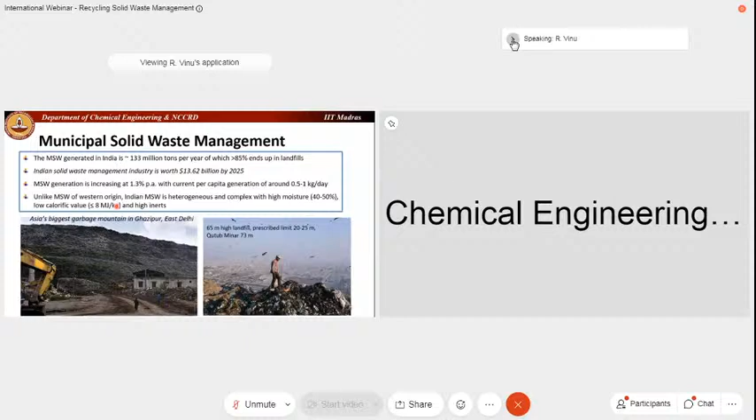So unlike MSW of Western origin, Indian MSW is highly heterogeneous because it contains a lot of domestic food waste and bioorganic waste, which results in a significant amount of moisture. Because of the very high moisture, the calorific value is going to be very low. Apart from moisture, it also has a lot of inert materials such as sand, glass, metal canisters. So a lot of these constituents are present in our Indian MSW, unsegregated in the landfills.

And the conventional technology practiced, for example, in Tamil Nadu is composting. Typically, the organic wastes are treated very well, but the inorganic waste, the plastics, are not so well treated, and this is what really ends up in the landfills. And what are these plastics? A majority of these are single-use plastics, constituted by the packaging waste.

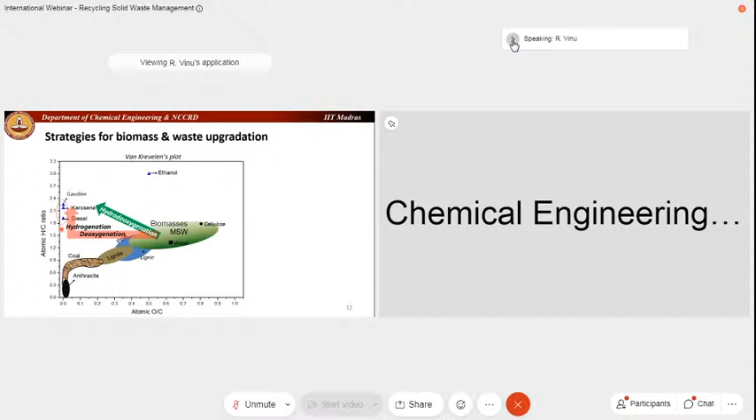So if you now want to convert them to gasoline, kerosene, diesel, which do not contain any oxygen but typically contain carbon and hydrogen at a ratio of 1:2, we need to do a significant amount of deoxygenation, and we also need to do what is called hydrogenation. Because deoxygenation means we want to remove oxygen from the material, but oxygen can be removed only in the form of carbon dioxide, carbon monoxide or water. That means for every atom of oxygen that is removed, we are also losing some carbon or some hydrogen.

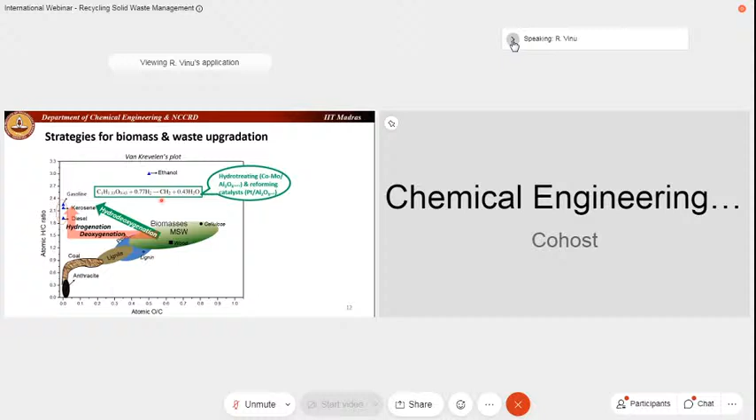As a result, we need to do hydrogenation along with deoxygenation, or what is called hydro-deoxygenation. That's a combined hydrogenation and deoxygenation in a single step using catalysts that can produce hydrocarbon-based fuels. So coming to the topic of our process.

One of the key challenges with the majority of thermochemical technologies like pyrolysis or gasification is that we need a feedstock which is dry. That means the moisture content has to be lower than 10% or 15%, so that we are not spending a significant amount of energy simply to dry the feedstock.

So one of the key processes that can be used to produce liquid or solid fuel from wet feedstocks, such as solid waste, which can contain even more than 60-70% moisture, or feedstocks like algae, which are grown in water bodies, is a technique called hydrothermal liquefaction.

What is hydrothermal liquefaction? It's very simple. It's a method that mimics Mother Nature in producing fossil fuels. Typically fossil fuels like crude oil and coal are generated underground over millions of years through the application of high pressure and temperature. We are trying to mimic the same thing in a reactor by maintaining subcritical conditions.

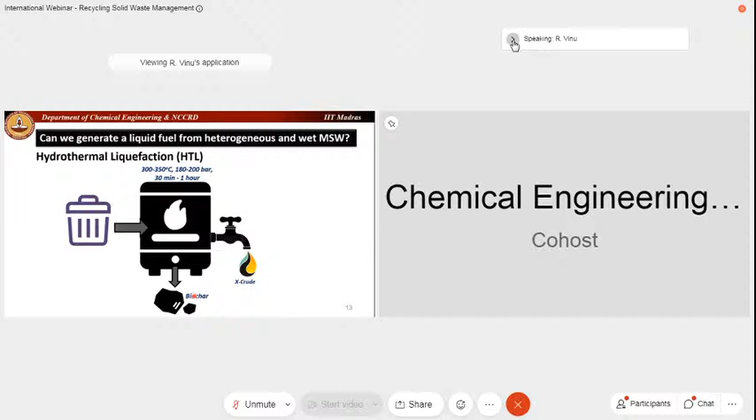So it has a lot of advantages, but the major disadvantage is it is highly viscous. Its viscosity is very high, and so it is not very easily flowable. As a result, there are some disadvantages with biocrude which we need to tackle to make sure that we are able to utilize it as a liquid fuel.

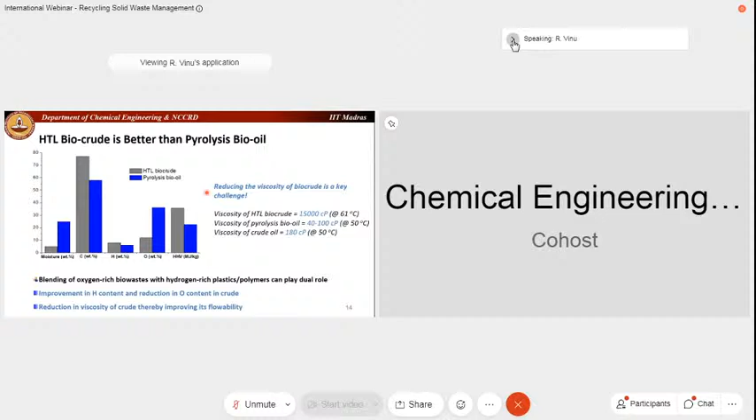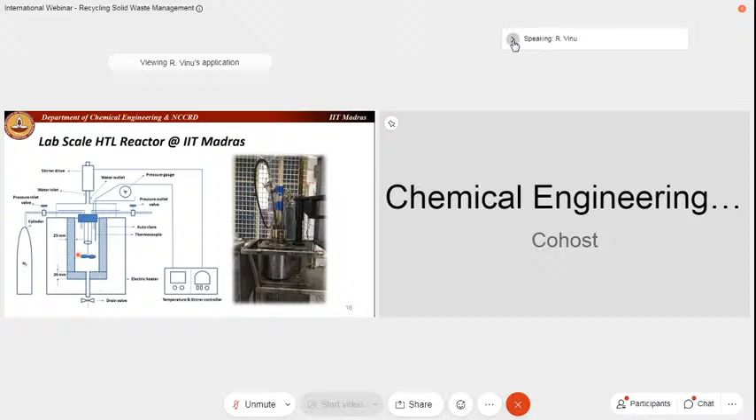Once we release the pressure, we can take out the gases, collect the gases, and analyze the gases. The reaction mixture is going to contain the aqueous phase, the biochar and the biocrude all mixed together. So we need to separate them, adopting some standard techniques. For example, one practice is filtration. On a larger scale, we can use a filter press,

but on a smaller scale, we can do a vacuum filtration, and we can also do solvent extraction using favorable solvents like dichloromethane or ethyl acetate and so on. Then we can separate out the solid phase, the liquid biocrude phase, and the aqueous phase into 3 different fractions, and then evaluate their quality.

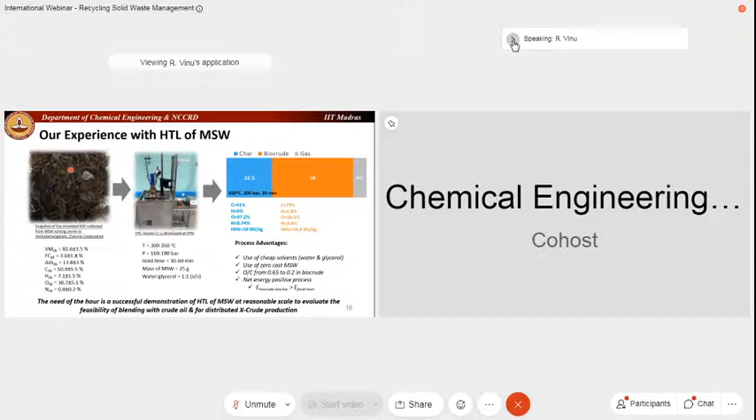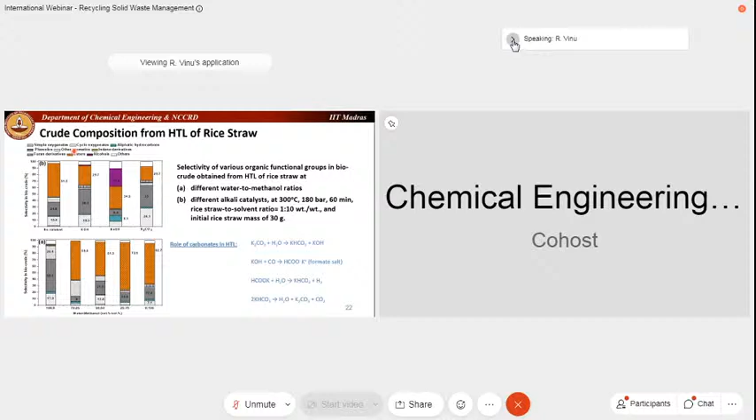For example, with potassium hydroxide, sodium hydroxide, and potassium carbonate, we see different compositions of the biocrude product. In one case, we are getting more long chain alcohols, whereas in other cases, we are getting a lot of phenols in the biocrude. And even by changing the water to methanol composition, we can change the selectivity of the product. For example, once we add methanol, we see a significant amount of esters in the biocrude, because of a variety of esterification reactions that occur when we add an alcohol like methanol as a co-solvent.

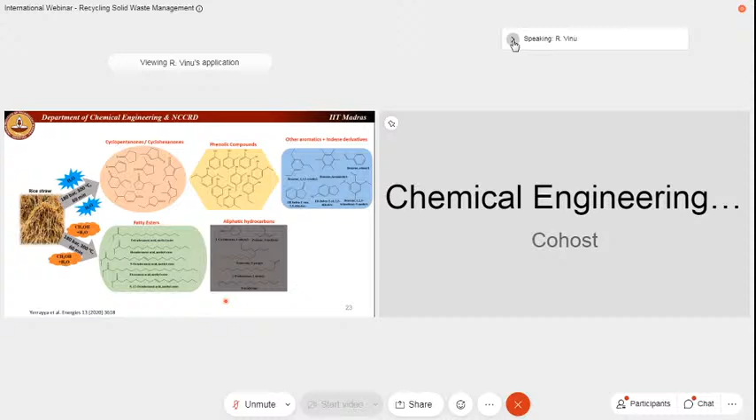So you can see that without any co-solvent, we get mostly cyclopentanones, cyclohexanones, phenolics, and aromatics, whereas with alcohol, we are getting a lot of fatty esters and aliphatic hydrocarbons. So the presence of a solvent can greatly affect the composition of the biocrude in terms of the reactions it undergoes, along with the products that are generated during the process.

Finally, we need to make sure the entire process is sustainable. We get an aqueous phase product containing some organics and also ions transferred from the biomass. This is a typical flow sheet where we recirculate the aqueous phase back, enabling process intensification to improve product yields while minimizing water requirements. Even though we use distilled water in experiments, we are also investigating how to use impure water, like effluent treatment plant treated water, which isn't of drinking quality, in this hydrothermal process.

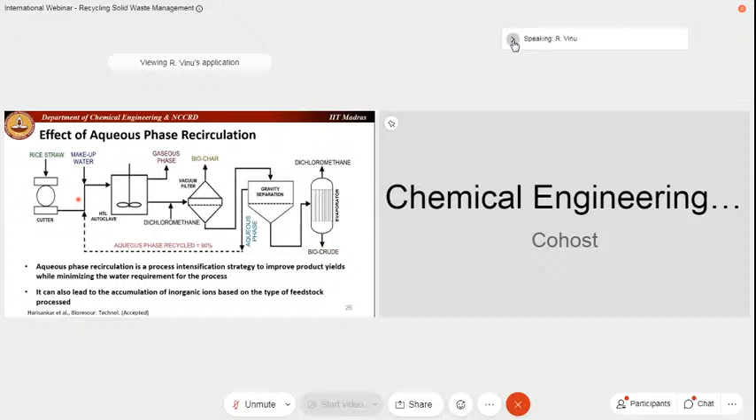In this process, we took 80% of the aqueous phase, mixed it with some makeup water, and repeated this experiment multiple times to see how product yields change. Starting with fresh water, we then did recycle 1, recycle 2, and recycle 3. We see that the yield of biocrude is decreasing, whereas the yield of biochar is increasing.

This was partly correlated with increasing potassium and chloride content in the aqueous phase with every recycle, because rice straw contains significant potassium and chlorine which transfer to the aqueous phase during the process. We also see significant calcium and silicates transferred to the aqueous phase, which can alter the quality and yield of products generated from a material like rice straw.

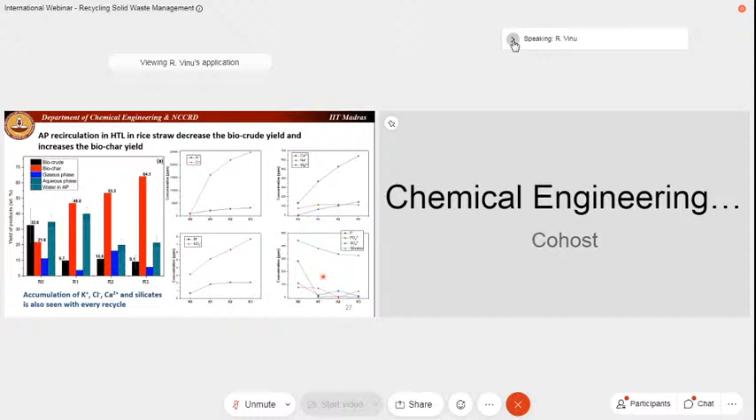To summarize, we are expanding the feedstock range. I've shown results with rice straw, bagasse, MSW, and we've also performed studies using defatted yeast and macroalgae like Kappaphycus and Spinosum. Overall, there is huge potential for this process to emerge as a feedstock-agnostic process, one that can take feedstocks that are really wet as well as significantly dry, with no limit on moisture content.

We are trying to go up in scale, because most of our experiments so far have been with small scale batch reactors. It's important that we establish the process with continuous reactors and on a larger scale, so it's easily adoptable by industry later, which we are trying to implement through our startup company.

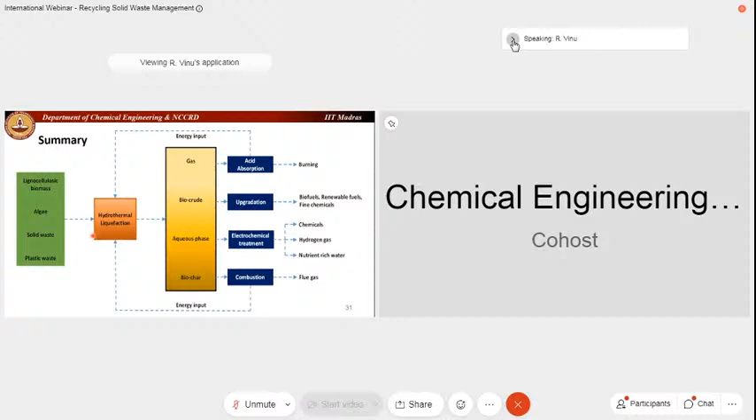So this I would like to present as a summary of the whole presentation. And finally, acknowledgements to my students who have been working on all different topics, and to my collaborator who is especially working along with me on the hydrothermal liquefaction process, and funding by a large variety of industries, not only on hydrothermal liquefaction but also on pyrolysis related technologies.

Our HTL works have been funded mostly by Engineers India Limited and C6 Energy, who have been supporting us on the macroalgae hydrothermal liquefaction process. So with this, I would like to close and thank the organizers for the opportunity. And if there are any questions, I can discuss.

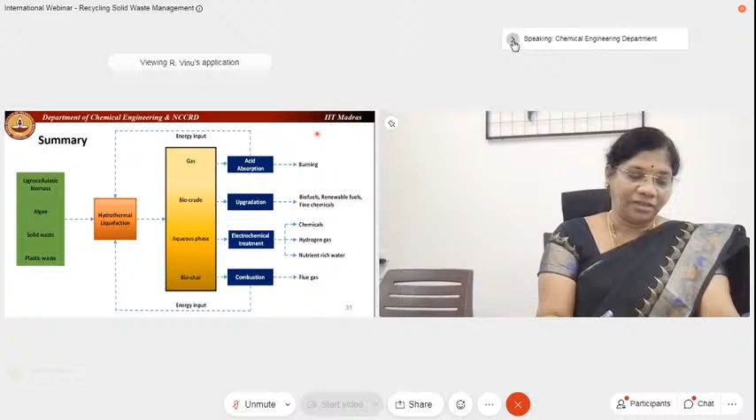Any queries from the participants? Okay. Thank you, sir, for taking the time. Am I audible, ma'am? Yes. Thank you, sir, for taking your valuable time to share your knowledge with us.

We now understood how a lot of energy is being wasted, as there is not proper utilization of agro waste, municipal waste, and how proper disposal and usage of these wastes can be helpful in generating energy. We also understood what hydrothermal liquefaction is and its importance, and the advantage of hydrothermal liquefaction biocrude.

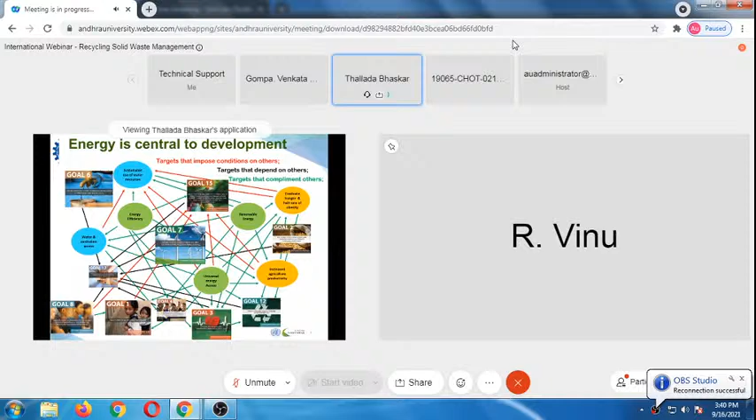The scientific and technological interventions have to be looked into: how economic benefit can be obtained with scientific and technological thought to use these material transformations. What actually is resource efficiency? Resource efficiency we can define in two ways. Use less resources to produce the same given output, or use the same given resources to get more output. So either you reduce the resources or increase the output.

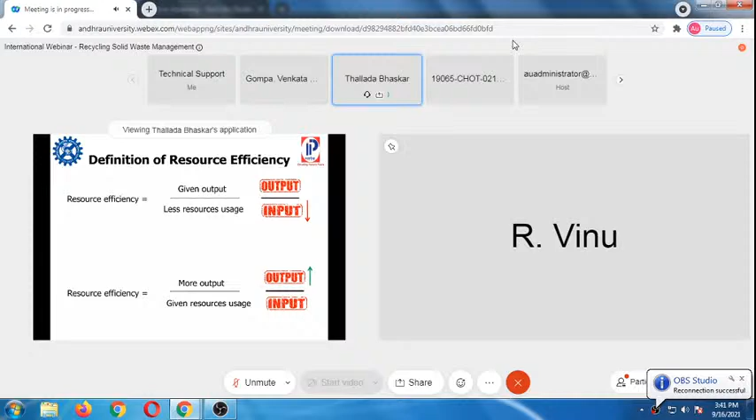That is what we normally call crop yield per drop. That means using the same drop of water, we need to increase the efficiency of the food. Similarly, resource efficiency has to be improved. But we should not be restricted here. There is a lot of deep thought in it if you look at efficiency: how it has to be connected to the circular or linear economy.

Ever since human existence we have been living in a linear economy way, only looking at economic development, but at the same time we create a lot of environmental issues. So environmental degradation is beyond our control. Now, what actually is the circular economy? Circular economy teaches us to develop the economy, but without environmental degradation. So what we have to do is decouple economic development from environmental degradation. This mantra of circular economy has to be looked into.

I will go through some of these slides, the case studies, and how strategically they have been utilized for the linear and circular economy. Now the issue is we have 1.3 billion population and we have a lot of developmental needs, but the heavy usage of resources has serious consequences on the environment. So the negative impacts have to be addressed. That is why the efficient use of resources is essential for India.

Most of the audience are students. So it is my sincere request to think about the way we have to address solid waste management, or look at solid waste in a different way. Otherwise, again, we will end up in a bigger problem than the mistakes we made over the last 50 or 60 years by utilizing fossil-based resources without doing any end of life cycle assessments or end of life treatments.

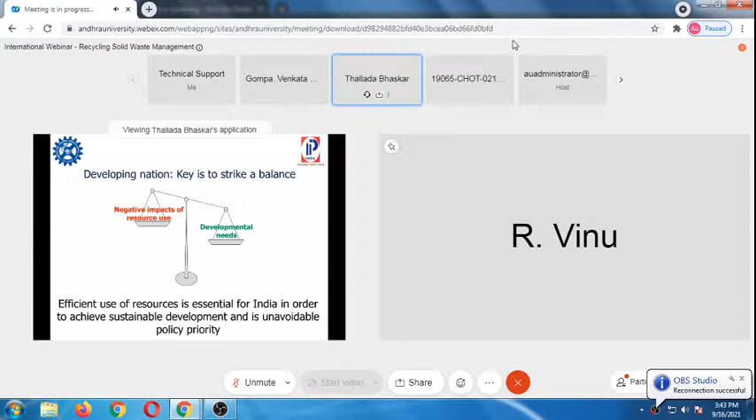With this brief background, when we look at the national priorities, the Government of India and the INDC decided that for the 300 million with no access to electricity, we should provide 24/7 sustainable energy to all, and committed to reduce carbon intensity by 33 to 35% by 2030 with respect to 2005 values, with fossil fuel reduction and renewable power increase. There are several commitments which are directly or indirectly linked to energy and also the bio-based.

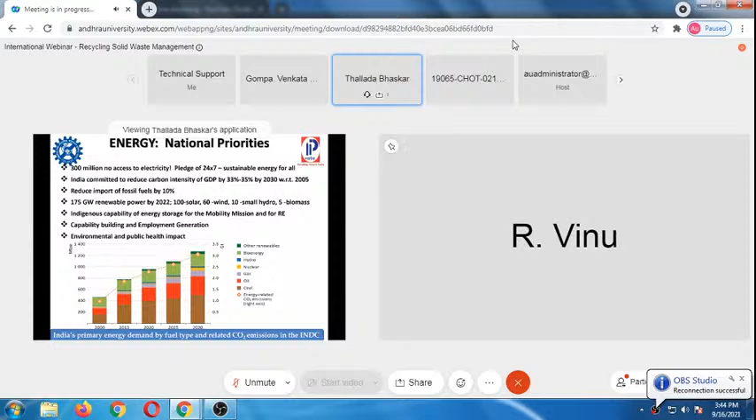I don't want to explain, because several people explained the present usage and the numerical values of energy for India. Now, India is on the path of self-reliance. What we are thinking of is that biomass is an important resource in the process, and it is a renewable material, and it is organic carbon. It is not inorganic, it is organic carbon. Why is it organic carbon?

When we see the energy or the hydrocarbons being utilized today, whether it is for a chemical or an energy purpose, it is basically the organic carbon coming from the fossil-based resources. With this thought, we need to look at the availability of the organic carbon resources. So the renewable carbon resources aptly suit this. The reason is, whatever we call today the fossil-based resources, they are also formed from renewable resources only.

If you see the history of the crude oil, the history of the fossil-based resources, they have been formed below the earth's crust several years back due to the pressure and the temperatures exerted there. So they formed in the form of gases and liquids. The same way, we can also produce biomaterials, biochemicals, biofuels in the form of energy or chemicals using the bio-based resources.

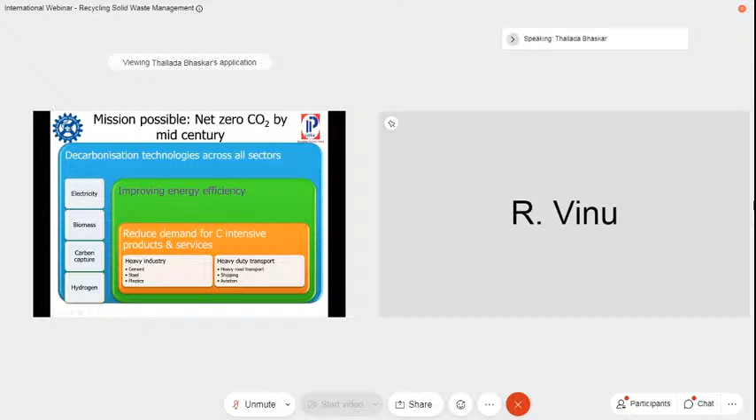So now, decarbonization: we are thinking of net zero carbon dioxide by mid-century. That is what the Honorable Prime Minister conveyed from the Red Fort on August 15th also, that we need to decarbonize the technologies across all sectors. How this will happen, and how our young students attending the event should think down the line, to see by 2050 from now onwards.

That is, to understand the decarbonization processes for electricity, you can use biomass and also carbon capture, and finally hydrogen is also one of the best solutions, provided the end-of-life emissions can be sequestered or used for different applications. The most important is energy efficiency. If we improve energy efficiency by reducing carbon emissions, we need not depend much on the renewable resources too.

Then the reduction of the demand for carbon-intensive products, basically the heavy industries, that is cement, steel, plastics, and the heavy-duty transport, that is the highways, and also the shipping and aviation sectors. These need to be utilized by the hydrocarbons. These are the major ones, but there are several minor industries which will still depend on them even after 100 years. Considering this, the strategic design of use of these carbon materials is essential.

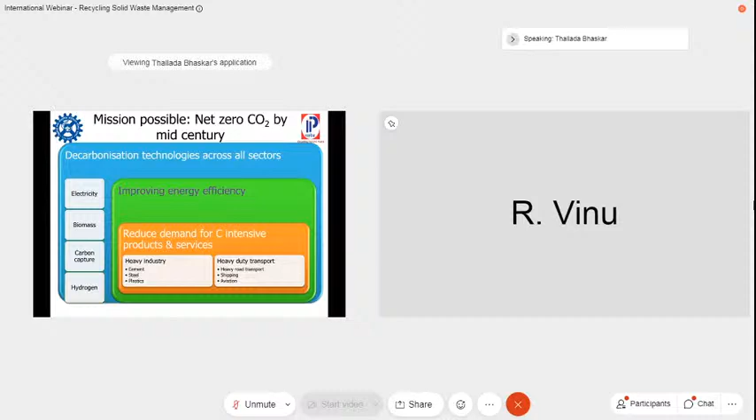When we assume decarbonization by 2050, what is the genesis for this? If we see the genesis, today, as the professors mentioned, the import of crude oil is approximately 220 million metric tons, and the carbon present is 85%. The carbon content is 190 million metric tons, coal around 150, and similarly natural gas. So the total imports are approximately 350.

If we are able to find approximately 350 million metric tons of carbon atoms, I am not talking about the hydrocarbons, because even the crude oil we process downstream. Being a scientist at the Indian Institute of Petroleum, how many different downstream processes will there be to make the fossil-based crude oils into transport or liquid fuels? So that we need to think of.

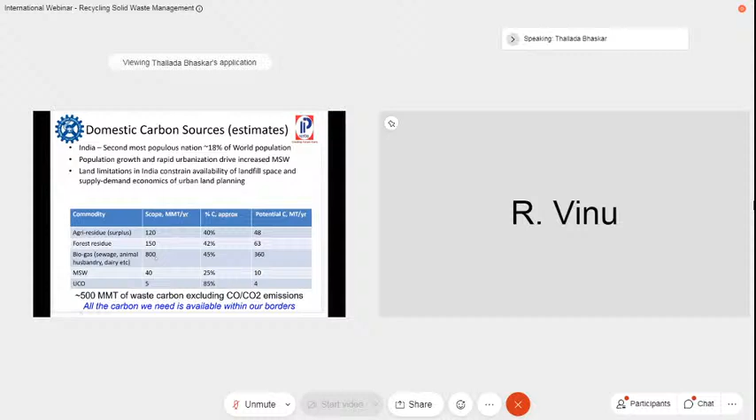If we see the available carbon resources domestically in India, there are more than 500 million metric tons of waste carbon. Now you can see here the agricultural residue at a minimum level, if we assume 120 million metric tons, forest residues, biogas, municipal solid waste, used cooking oil, there are so many, and these values I have taken at minimum. You will have more than 500. With this, we can meet the energy requirement and sustainability.

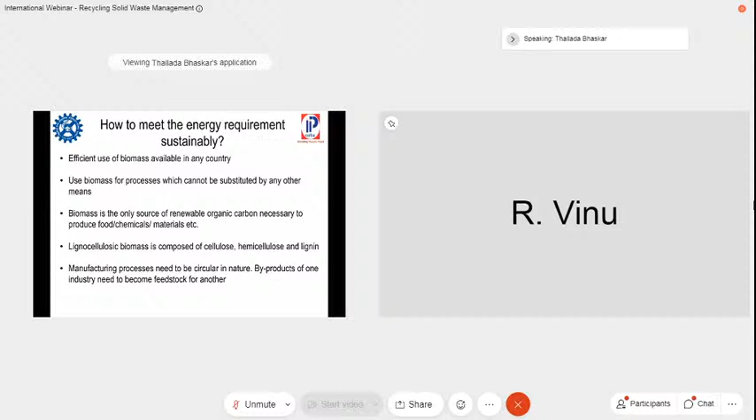As I mentioned, biomass and efficiency improvement, and manufacturing processes need to be circular. As for the available options, the Professor already mentioned them, so I will not take much time on this. There are first, second, third generation biofuels based on the feedstock, and being a 1.3 billion population, we cannot depend on edible materials, so we should only look at the second generation, which is non-edible biomass.

As a scientist and a National Task Force Committee member working on the National Biomass Policy, the National Biofuel Policy says clearly: reduction in oil imports by substitution with renewable fuels, 20% blending of bioethanol and 5% biodiesel by 2025. You might have seen several news articles recently; ethanol blending all over India is already around 8% and is being practiced from different resources, to achieve a 35% reduction in energy emissions.

To address this, we have more than 260, 270 million metric tons of surplus biomass available, 270.

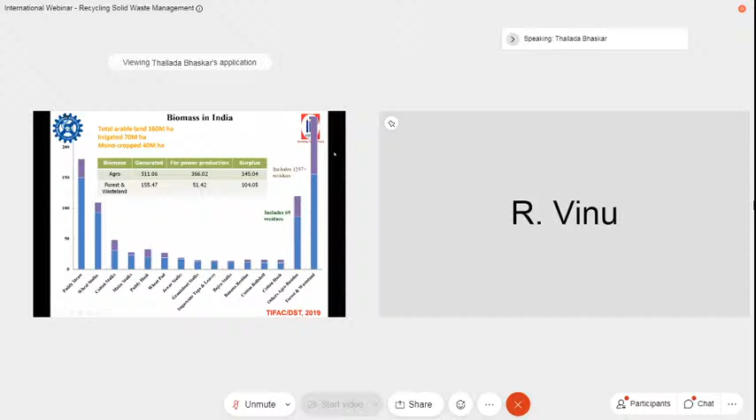And now you can see that this is much more available. This is a 2019 report, and recently we have released another report in 2022. If we see this one, there are different varieties of biomass residues, basically the wheat straw, rice straw, cotton straw, and maize. Some part is gram, that is also around 6%.

When we say biomass or the non-edible biomass, it is similar to other fractions or other resources also. When we say crude oil, all crude oils are not the same. The Australian crudes, Vietnam crudes, and the Gulf crudes are completely different. We need to do some pre-treatment process in order to make them suitable for the downstream process. Similarly, there are differences here that we will discuss in the coming slides.

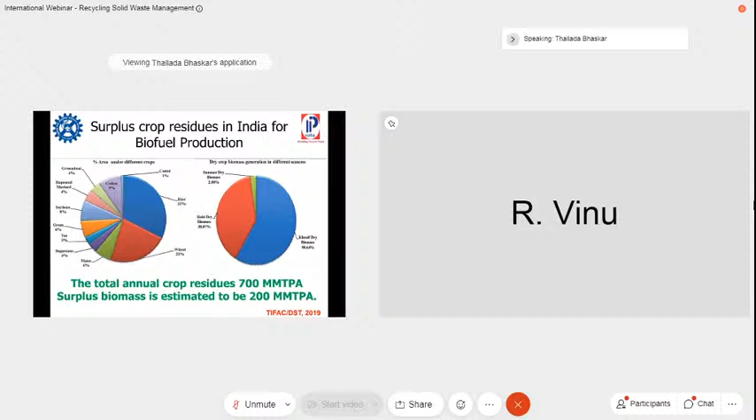So the total annual crop residues are around 700 million metric tons, surplus, as I mentioned, around 200. We need to convert this into the different products required, meaning locally available resources for local applications and local demand. As I mentioned, the demand and supply both match, or the supply is more than the demand, so what is the problem? The different climatic zones in India mean the biomasses available and the types of biomass available are not the same.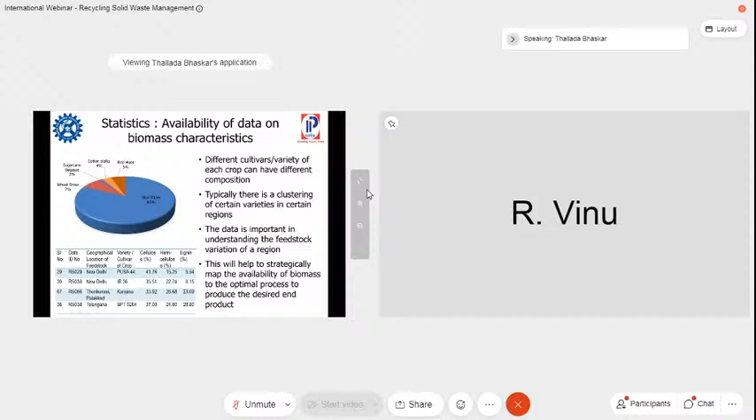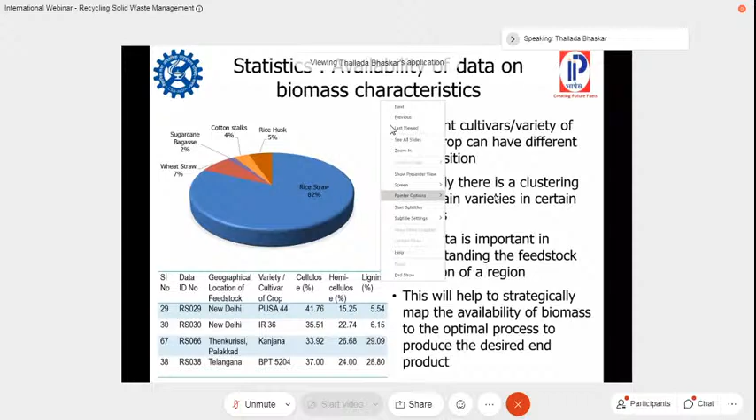Now you can understand, we cannot assume lignocellulosic biomass is uniform. No. You can see 30% lignin and 5% lignin. These two biomasses you cannot process by adopting the same technology. This is a small indication I am giving.

Now you can see the cellulose, which is basically the primary constituent for ethanol production. The difference from 33 to 41 is around an 8 to 10% change. When you see the downstream process of a 100 KT ethanol production plant design, it is tough. You cannot design a unit for so much variation in cellulose, because the downstream process will have a lot of variations. So we strategically map the available biomass to the optimal process and the desired product.

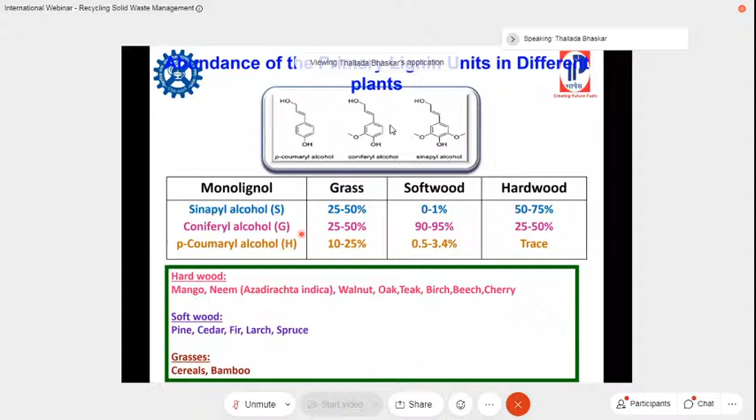Now, if we look at the different biomasses, there are grass, softwood, hardwood. Sinapyl alcohols, which are primarily available in the plants, are 25 to 50% in grass, only 0 to 1% in softwood, and here it is 50 to 75%. The typical examples you can see here. That means grasses, softwood, hardwood are all biomass, but the composition of the monolignols present, the S, G, H units, is completely different.

This is another most important point you have to understand: the composition is much different. As an applied chemist, I can explain more that in softwood and hardwood, if you see the bonding, there is much difference in the composition of the different biomasses. The chemical structure of the phenol remains the same, but the bonds present are completely different. With these deviations, you can see the phenolic OH is 20 to 28 in softwood and 9 to 20 in hardwood.

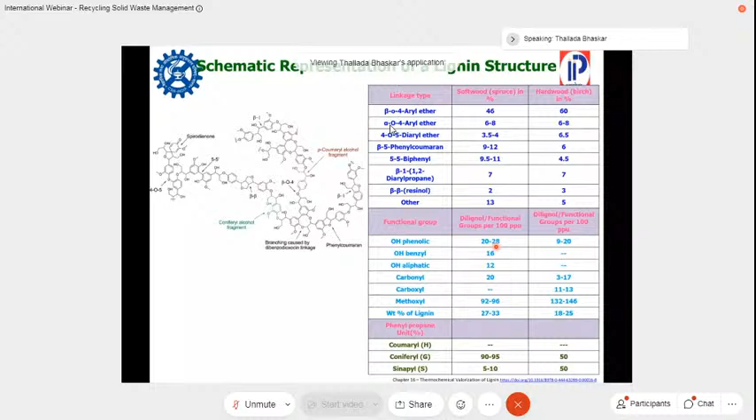With this much variation, you cannot design a single process to give the same yields, or the benchmark, or the viability of the process, or the commercialization. Now you can see the kinds of bonds present in the different biomasses. So with this concept, with these complexities of the biomasses, the title of my presentation is defined as the strategic design of the biomass for the production of chemicals or fuels for national domestic requirements.

So with this, we are compiling information on biomass availability across the different states, and this is a report available with TIFAC, which we recently published, in collaboration with space satellite data from Jaivoorja, from the NRSC, Government of India, so that this dynamic data is available for designing processes across approximately 623 districts in India that we have been matching.

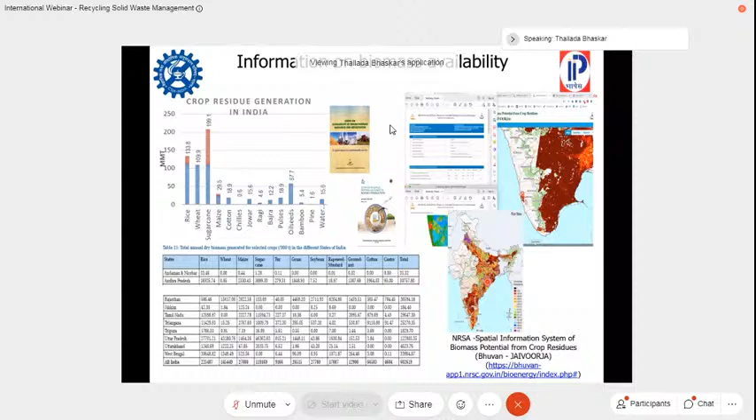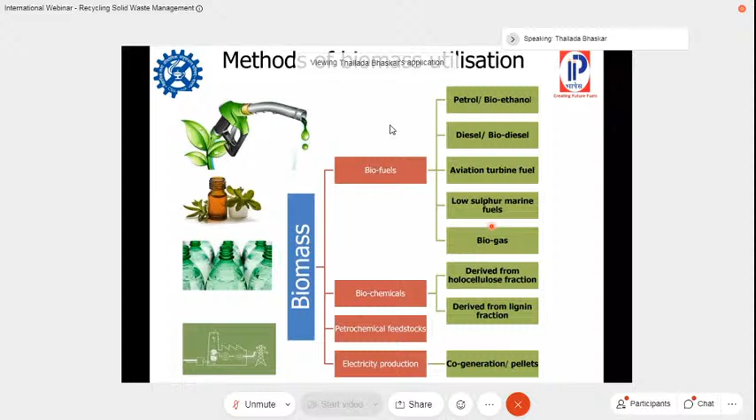Now, what is possible with the complexities here? Technically, chemically, you can produce all the products, but the basic platforms for biomass conversion are biotechnological, thermochemical, or thermocatalytic processes.

We like to explain the unestablished or the developing processes, compared to ethanol, which is at the demonstration scale of the large scale processes here. I will take you through some of the studies, the experiments done at our laboratory at IIP.

We have been working on carbonization, biomass to chemicals, different pyrolytic processes based on the feedstock, slow and fast, hydropyrolysis, liquefaction, that is hydrothermal liquefaction, and also finally, wherever it is possible, trying to upgrade the bio oil to fuels and chemicals.

And last but not least, the kinetics and thermodynamics, because after the laboratory scale study of the 1 kilo reactor, or the milligram level or the gram level studies, we need to do the ton scale, at least ton scale, because of the advantages in decentralized processes. We develop these different models.

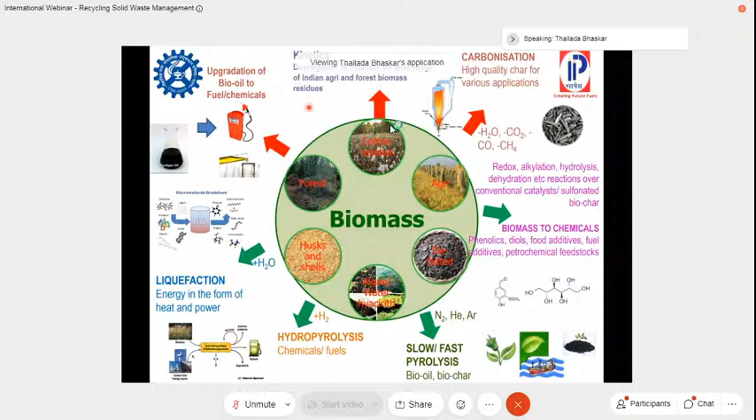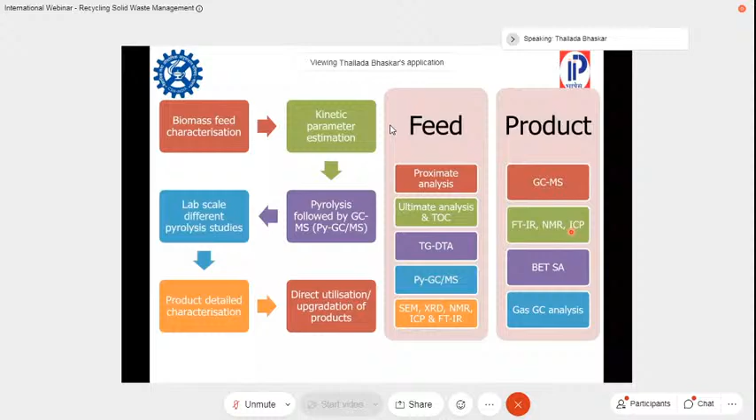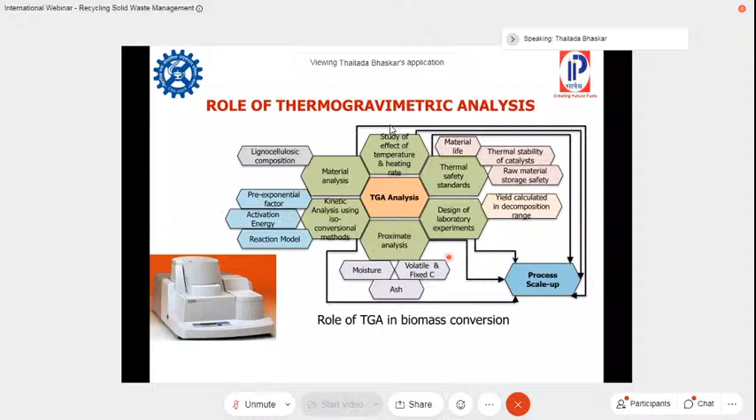This is a typical role of thermogravimetric analysis. As chemical engineering students, it is very important to understand the data using artificial intelligence or Python programs or different data sets, to understand the mechanisms and kinetic triplets, which are required for process scale up. We do this kind of mathematical treatment of the kinetic analysis by estimating the 3 different triplets and also design different models.

Otherwise, if we don't have models, all biomasses cannot be operated with the same reaction parameters to obtain a suitable product. Now you can see that with the change of the conversion, how the product profiles will change, how the kinetic triplets will change with the conversion. It is not like a conversion of a simple compound like benzene to phenol or ethane to ethylene, where throughout the reaction the endothermicity or the thermodynamics remain the same, so that you can control the reactor. But that will not take place in conventional or thermocatalytic processes.

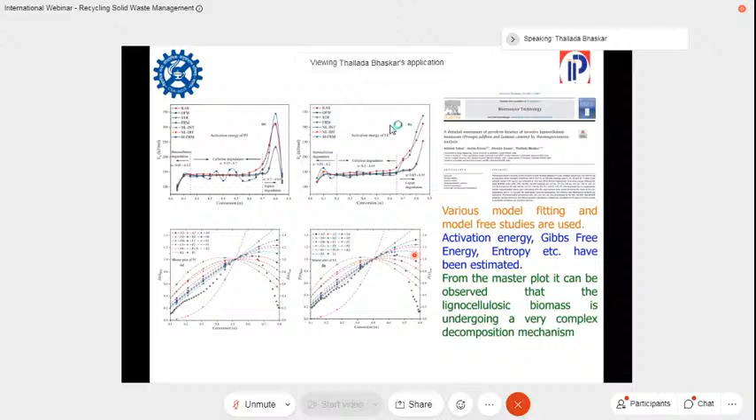Not only this, in other processes also, like the biochemical process, you need to design or pre-treat the materials so that you can control the energy, heat and thermodynamic balance. So we do the different master plots using several mathematical treatments. We have published several data and designed our own models, and they fit to more than 99.

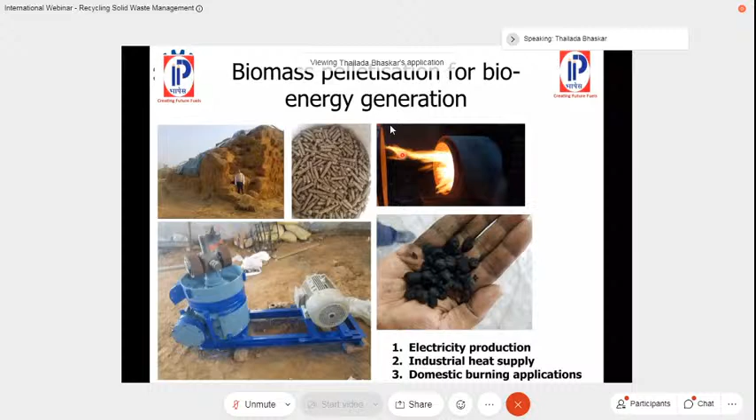Not every material can be made into pellets so easily, like our vermicelli. Not every rice straw, rice flour or other flour can be made. Similarly, the required strength and required properties must be met. So the design of the burners and pelletizers has been done for different applications used in the fields, and we are supplying this torrefied or pyrolytic material, or the biochar, for applications in different places.

Similarly, as Professor already explained the hydrothermal conversion process, I will not discuss it much, because I will explain the case studies which we have done. It has a lot of advantages, as Professor explained.

Our field study applying this is invasive aquatic species valorization, from Imphal, in the Loktak Lake. It is the only floating lake in the world. This floating lake has a problem because of these species, the paragrass, phumdi, and the water hyacinth.

We are trying to take out this one. We have done work and we have published articles and patents, and they generated the knowledge base for the conversion of these materials to produce value-addition compounds and functional chemicals.

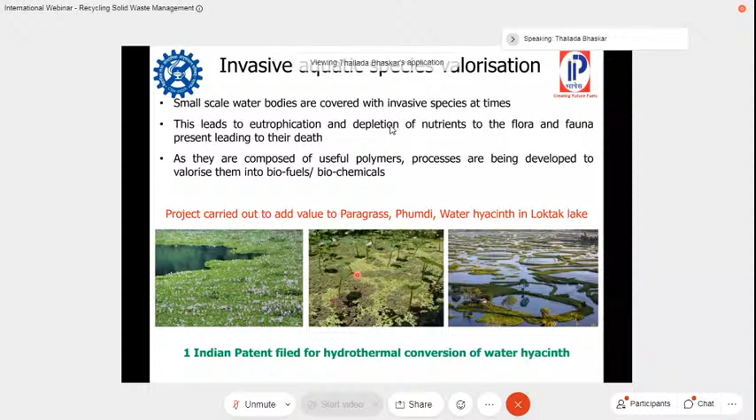Now, the next feedstock, which is the most important with 2G ethanol, is coming into the picture. In the ethanol industry, only the cellulose is being utilized for the production of ethanol, but the remaining lignin, which is presently unutilized, is burned for energy applications within the biorefinery. But this is the most important carbon material. Burning of this material needs to be stopped by using other materials.

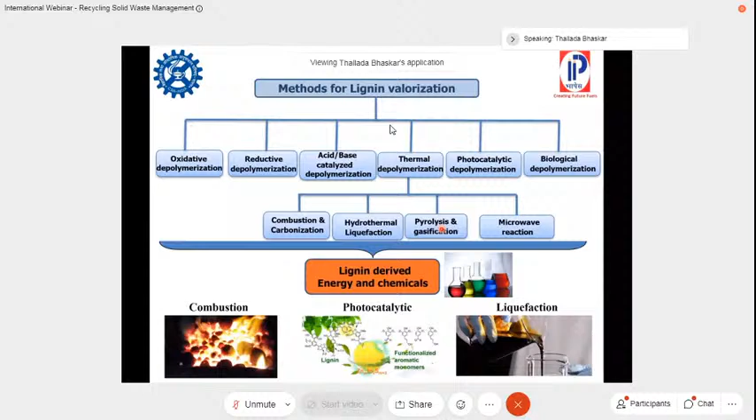So the process for lignin valorization. There are several treatment processes, but the lignin produced by the different processes will have different functionality. They are called different lignins; all lignins are not the same. So we are trying to utilize them using different approaches. If the biomass treatment is 10 varieties, then the lignins are also 10 varieties. So we need to utilize different methods to convert these materials.

Like this, we need to strategically design what process, what catalyst, what condition, and what downstream process need to be adapted to produce vanillin or acetosyringone, such valuable chemicals, from waste resources. These studies indicate that the design is very important, and what kind of feedstocks. We cannot generally say that this feedstock is suitable for HTL or this feedstock for pyrolysis. Now you can see HTL is basically applied to micro and macroalgae, de-oiled cakes, invasive water species, as well as lignin.

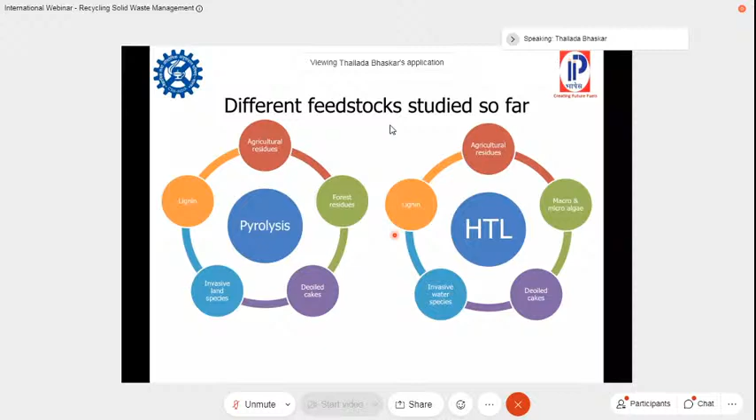But the problem is, when we want to use feedstock like stubble burned in the fields, where it is available sparsely in small quantities over large distances, how to collect, how to treat? That is the problem: supply chain management, logistics. If the energy consumed is more than the energy produced, then the conventional process will not work. So the idea is mobile conversion units.

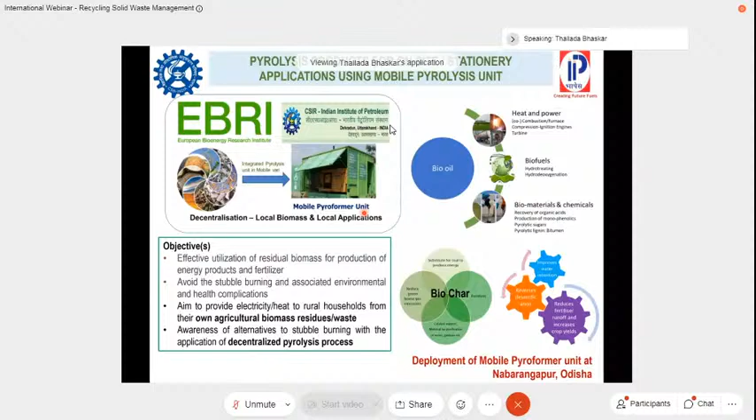This mobile unit will go to the field where the biomass will be converted, giving char as well as energy products there in the field. That will be used for enhancing the organic carbon in the soil, so that production will be more and we can move from fertilizer-based food to organic farming using these carbons, because the environmental and economic requirements for scale are not met today. That is why we are using these decentralized approaches, because these applications of the different oils are valuable. We are working with the industries.

Now you can see that these pyrolytic oils are used for herbal animal healthcare products, and this industry is present in around 35 countries producing and using these pyrolytic oils. But this pyrolytic oil process is different from the conventional one, and the feedstocks are also different, like the Patal Ganga, Patal Tantra, Patala Yantra process, as our typical Ayurveda is based on plant-based materials. We are working with this to produce from different biomass resources, and these activities are very good.

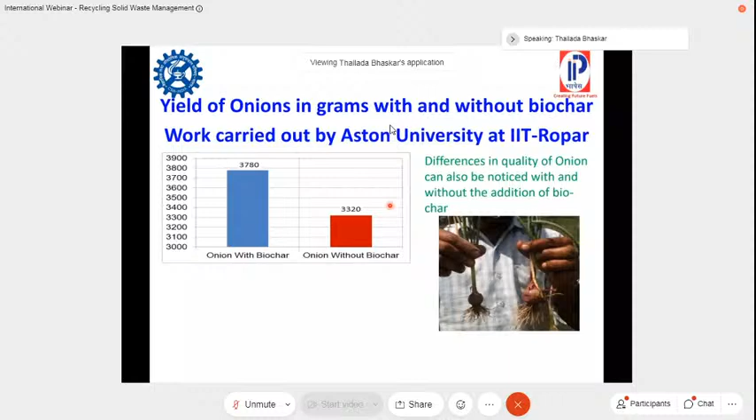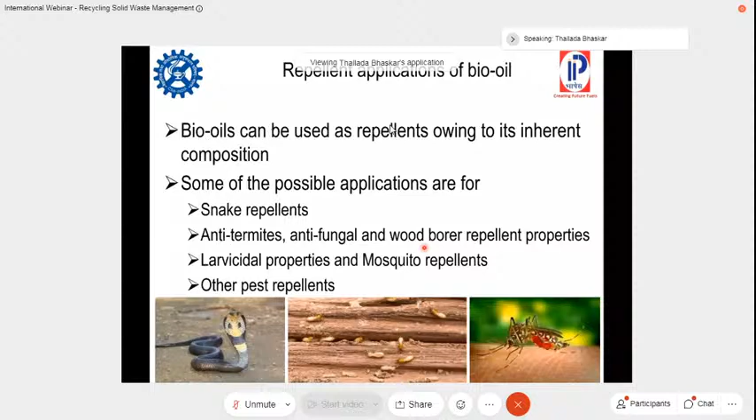Not only that, as I mentioned, with a 1.3 billion population we need food, organic food, and several governments have had issues because of onion prices. We are trying to use this pH-free biochar to increase the yield of onions, as well as applications for snake repellents, termites, fungal residue, larvicidal and other pest repellents using these bio-based components, because the present use of fossil-based chemicals has serious effects, and the market for those things is also difficult.

Now we need to find domestically available resources and applications for domestic demand, so that we need not import any outside products, and use renewable materials. Not only that, we are also trying to use other things through different processes.

In addition to the case studies, we are trying to do different fundamental studies with the help of 30 odd students in the laboratory to understand diverse feedstocks using different hyphenated techniques. Now you can see this Py-GC/MS method, used to understand the different lignins, heterocycles, aliphatic carbons, and phenolics from the different catalytic methods which I have explained.

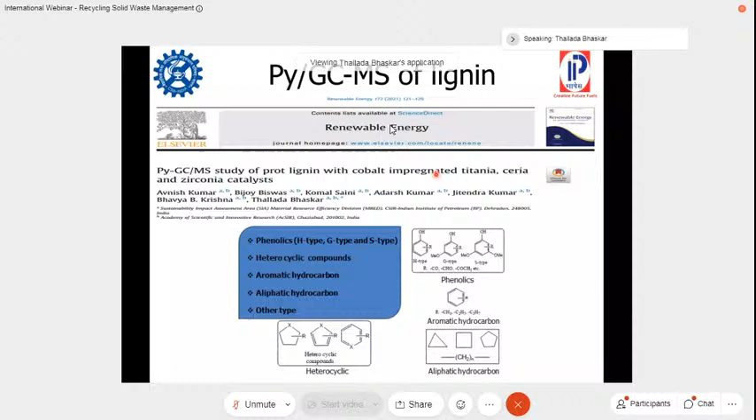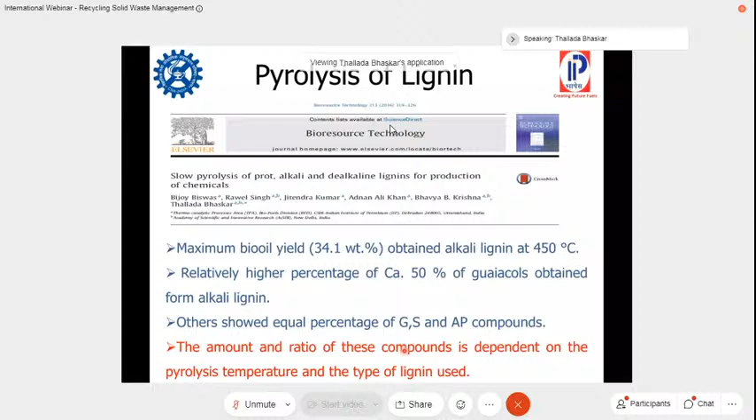Now, not just the typical one compound, we are also trying to see the increase in concentration of the guaiacols as well as other components with different lignins. Not just hydrothermal, we are also trying to see with pyrolysis also, so that value addition is possible through different alternatives, not by one method.

Because if you produce one chemical in large quantity, there will not be any market, then we will have a problem. So we need to see the supply and demand, as well as resource availability and efficient conversion.

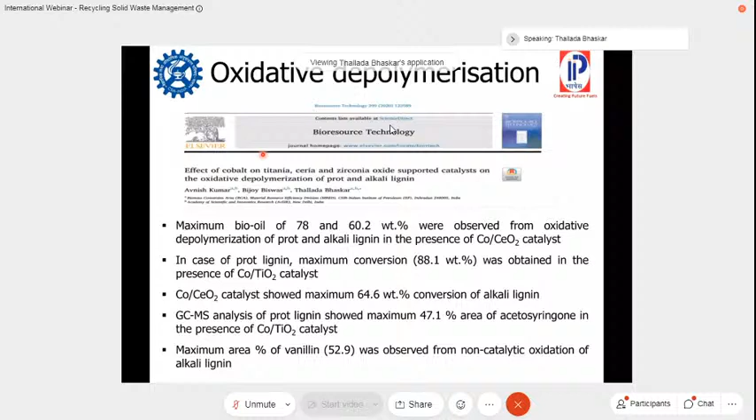In a similar way, we have also adopted the process for oxidative conversion, because the demand for simple acetic acid, vinegars, formic acid, and several other oxidation products is much in demand if you see the Government of India's data. So we are trying to convert that, and we generated the data and also prepared the catalyst to convert to the oxidation products.

In any of these dry and wet processes, we definitely get biochar. But the pyrolytic biochar, which is simple biochar, and the hydrochar, which is produced using the hydrothermal process, are different, because much of the carbon percentage is not converted, and in the processes you end up with a product that needs to be utilized.

Today, the demand for purified carbon, or carbons for diverse applications, is much high. This morning the professor mentioned the drinking water issue. Today all of us use carbons for water treatment. Those carbons need not be imported, need not be fossil based, and can be produced using waste feedstocks available across regions. But the parameters and pore structure have to be generated in an optimized process for commercial feasibility.

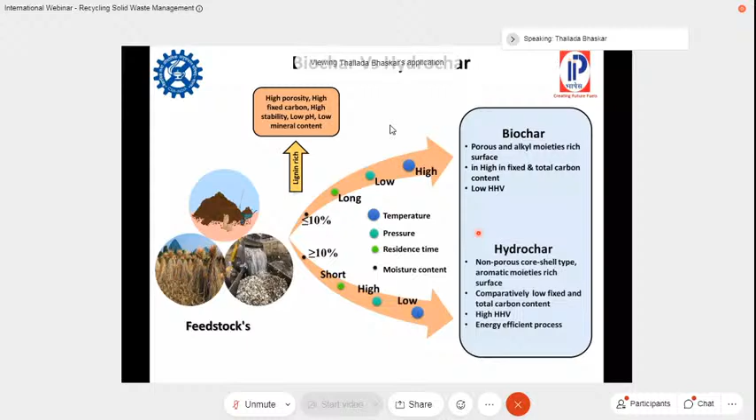With this, we wanted to have a model of decentralized small scale units to process the biomass into liquids. Once we have decentralized units convert through a centralized process, with the decentralized approach we need not transport the low density materials like biomass over large distances. Once you convert into oil and char, the heavy dense materials, similar to crude oils, can be transported to use the existing refinery infrastructure, and then produce different products.

In a cyclic, circular manner, you use the agricultural waste, harvest, then use the thermochemical process, use the energy, and also enhance the carbon in the soil to produce more food. So in a circular way, we can increase the economy of the farmers as well as use the resources, and avoid importing fertilizers.

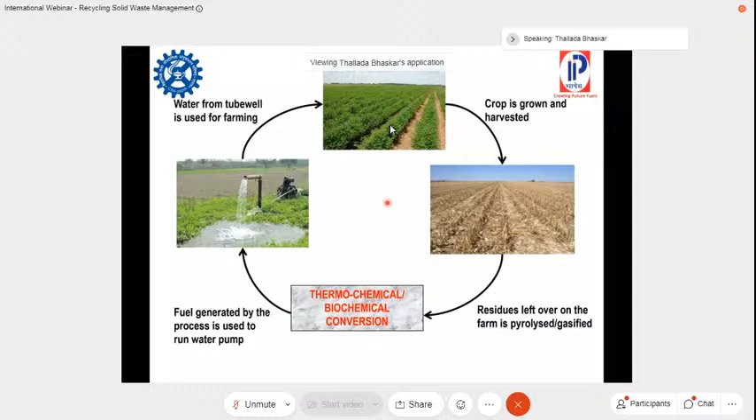We need to study different case studies. Different soils have different environmental effects, as well as different biomass available. I am working in several districts in different states in India to apply different models. This is a typical case study funded by the Global Challenges Research Fund with different NGOs. It is called the GCRF fund.

In the disadvantaged rural areas of Odisha, we are trying to generate this BioTrig model, so that we produce all kinds of products which are required in the districts.

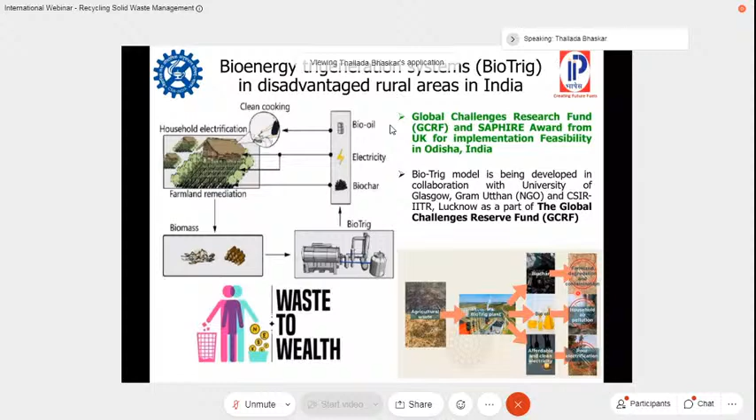This study we wanted to focus much on biochar for soil amendment, with the help of ICAR people and agricultural people, so that this can be done properly. Without proper understanding of biochar, every black material is not biochar. If it has a lot of pH, it will kill and spoil the entire soil, making it more useless than before. So one has to be very careful how one converts these kinds of materials to use as biochar for soil.

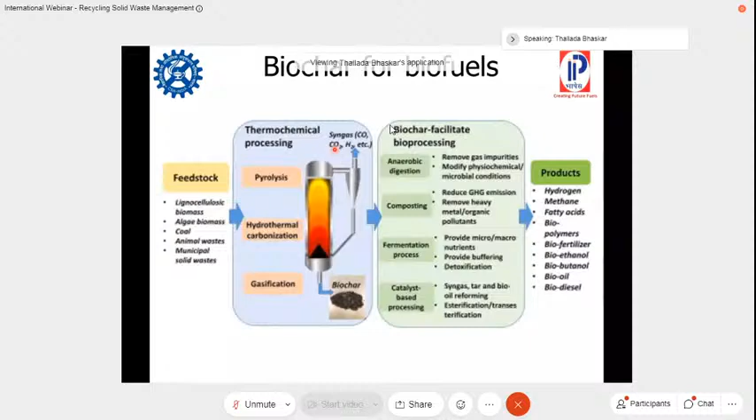Not only that, you can use biochar for different applications. I will tell you some case studies. As the professor mentioned about biochar for energy, we also use this biochar for different catalytic applications. Catalysis is a different phenomenon.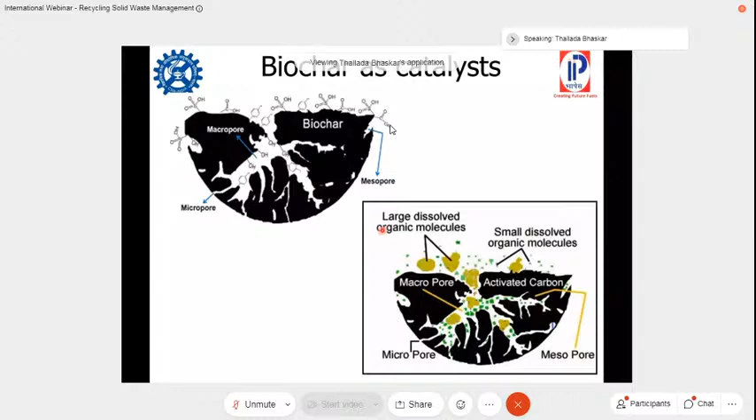It has lot of porous structure. You have the active components, active metals impregnated on the materials. We used this kind of pine needle - I am in Uttarakhand, it has lot of pine needles, and it has forest burns. Forest fires can be avoided by using this one to convert into pine char, which has very special properties. Using this special biomass decorated with ruthenium nanoparticles, we convert this into a catalytic material.

This is a highly demanded product today, and this is not an imported catalyst. Today we are importing huge quantities of catalyst from abroad. So using typical available resources and basic fundamental scientific principles, you can generate and produce this data that recently we have generated and published a big article on, showing how we can translate that.

Similarly, cellulose can be converted into methyl alpha and methyl beta glucopyranoside using a carbon-based catalyst. That is a product obtained in the form of biochar. This is a very expensive material. Only a small quantity is required, but the catalyst being presently used is imported material that we can avoid.

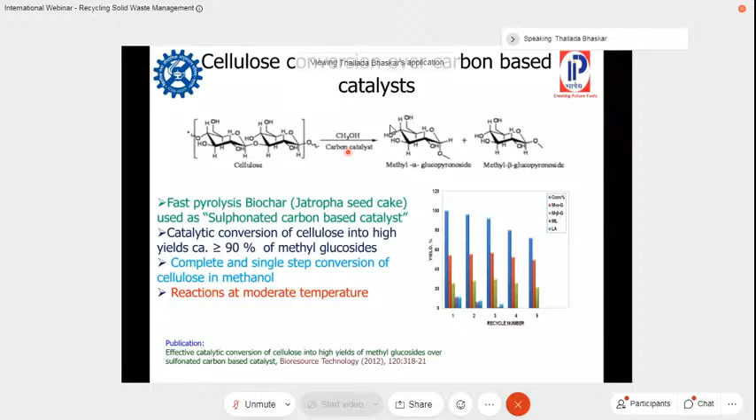By using this biochar - once you purify and identify certain feedstocks, this functional biochar can be used in electrochemical applications, and there's a lot of potential. But the functionalization, whether for hydrogen generation or electricity generation, is a small scale process because the demand for such materials is also very small. Every biomass need not be produced into this kind of material.

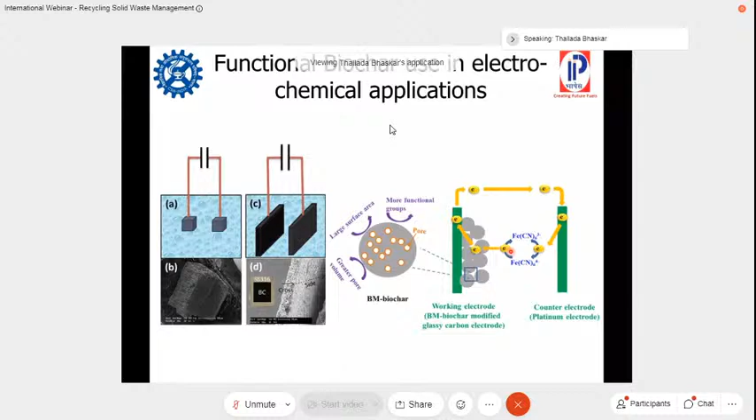Using this, we are producing specialty carbons for supercapacitor applications for the electrode. Now you can see that a typical biomass found in India has very high specific capacitance, which is comparable to even other materials. This is a waste material, optimized to use as a capacitor application.

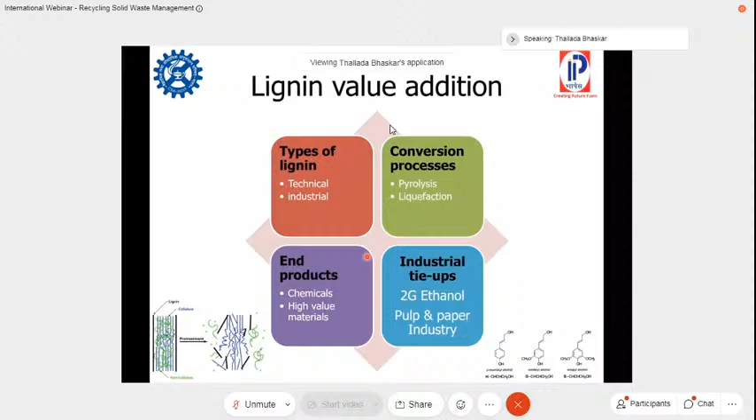Similarly, the lignin, as I mentioned, is a major component - 25 to 30% of the lignocellulosic biomass, which is not used, as I mentioned earlier. There are several applications of this. We are trying to do that by understanding and optimizing this one, but there are several challenges in terms of the feedstocks, availability, the kind of biomass, and sustainability design and renewability.

If this is not there, it will become a challenge. We need to understand the basics of thermodynamics, basics of the photosynthesis process - the amount of biomass burnt or converted, the photosynthetic efficiency to produce the biomass should be the same. Otherwise, we will have more serious consequences than the climate change happening due to the use of fossil-based resources. So we need to understand these issues also.

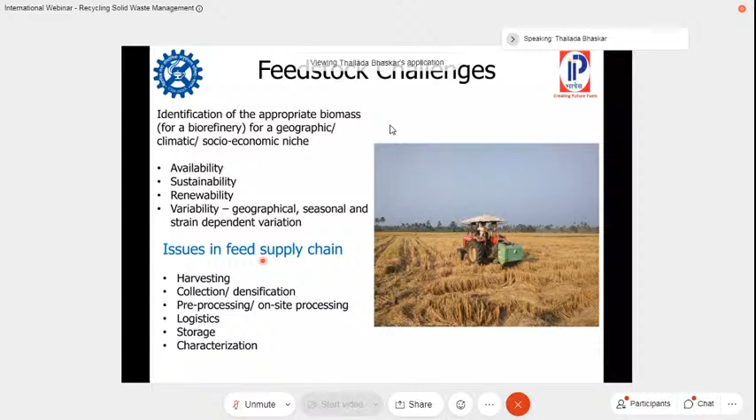So what is next? There are several strategic choices to be made for biomass utility - environmental issues, social issues, economic issues. Otherwise we will not address the sustainable development goals. You need to understand that competition between different biomasses might lead to incoherent policies and serious implementation issues. Otherwise we will end up in other issues. Strategic design, strategic application is essential.

Otherwise, every waste material cannot be produced using pyrolysis, slow pyrolysis, or hydrothermal processes. The economics, the end use of products, and the downstream separation process are most essential. So energy is the maximum required commodity, but has low value. But biomaterials without much decomposition can be produced to have carbons like these, high specialty carbons.

Biochemicals are also much in demand, but compared to energy products, only 4 to 6% of fossil-based crudes are converted into chemicals, so the demand is less. Biofuels are very high, bioenergy is very high. So the renewability, sustainability, circularity need to be looked into.

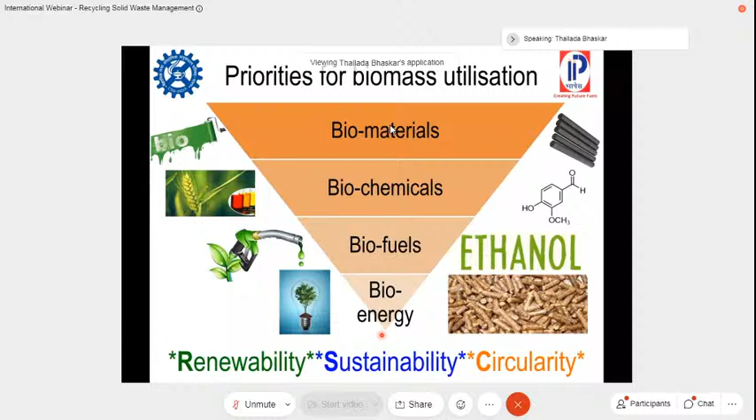I will not take much time. We'll take a few minutes to complete the plastics issue, because when we talk of biomass or bio-based materials, plastics is also part of our everyday life. Now, not only simple recycling, we can do upcycling as well as recycling and downcycling. What actually recycling is, is you are closing the loop. Upcycling means not immediately closing the loop, but you are increasing the value. Downcycling means the value of the produced product is much lower compared to the original material. But environmental factors, environmental issues need to be considered in all these cases.

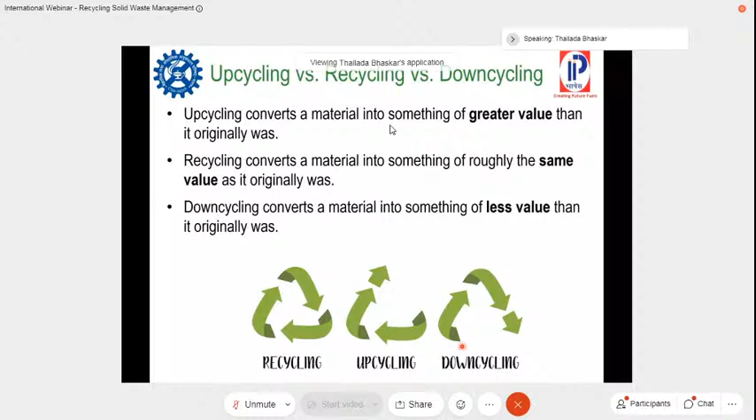I will take you through one simple case study. Now you can see this upcycling.

If you have a simple PET water bottle, you make two pieces, use this for the water purpose and this for the lighting, for example. Now the value of this is increased much. The applications are more different, so the value is more here.

Recycling means you are trying to make the PET bottle into another PET container or bottle, recycling with a similar value. Now you can see another example, this is recycle and upcycle, making old discarded cloth materials into bags, without much destruction, or tertiary recycling, you are making the value.

That is why we can see there are several materials in the showrooms, the recycled products which look very nice. By using design artifacts or the skill set, you can make more value using these materials, because polyethylene terephthalate is a material without much additives, no impurities. It is a pure material.

So plastics should not be looked at in a different aspect. They are the best materials, but the end of life treatment is very much essential. That is why I call plastics a gold material, provided you properly use it at the end of life. So upcycling and the circular economy are different. You need to do it in an upcycling way, closing the loop but with value addition, addressing the sustainable development goals.

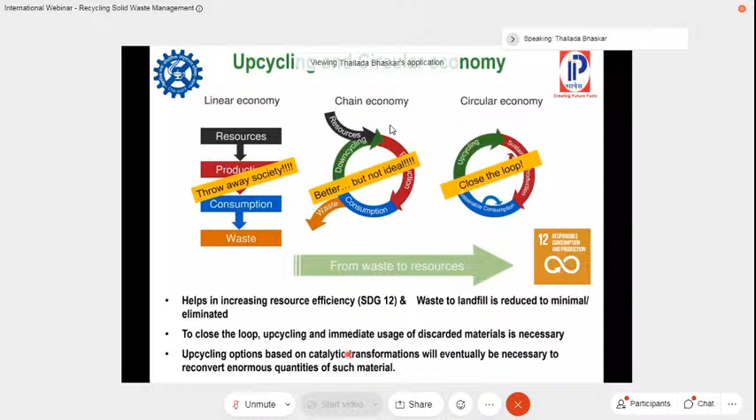Lastly I'm talking about electronic waste, because I am working in this area also, plastics and electronic waste. As I mentioned in my initial address, there are materials that cannot be renewable. Now you see a typical telephone, mobile phone, has around 50 elements from our periodic table. We cannot grow these materials, and once we discard this without any scientific method, we will have serious issues.

That is why, as the professor mentioned in the introduction, Japan has developed processes to treat waste for the production of Olympic gold, silver, and bronze medals. We need to adapt and improve these processes for the available waste materials in India. The reason we cannot directly take some processes is that the kind of resources and concentration of metals available is different, so you cannot apply a process designed for one concentration of metals to a different concentration. This needs to be strategically obtained.

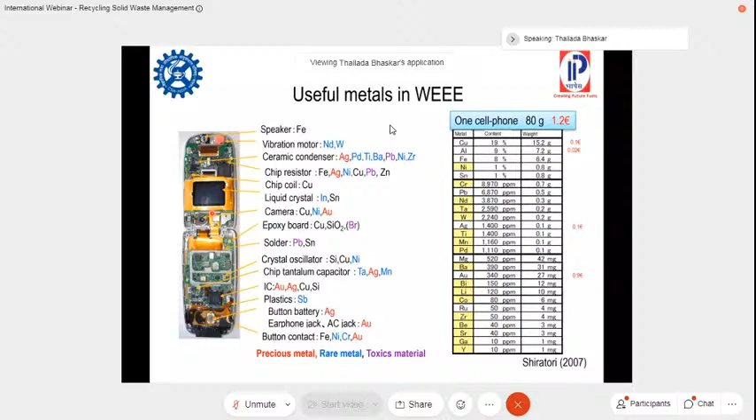Immediately this will affect the flora and fauna, even our systems. There are already several places which have had a lot of impact. That is why sustainable and strategic design of the treatment is essential.

I have been working for the last 20 years in this area, just in plastics and e-waste: 36 journal publications and patents on plastic valorization, several book chapters on e-waste and PVC mixed plastics, and also working as a nodal officer for mega projects on plastics and other waste materials.

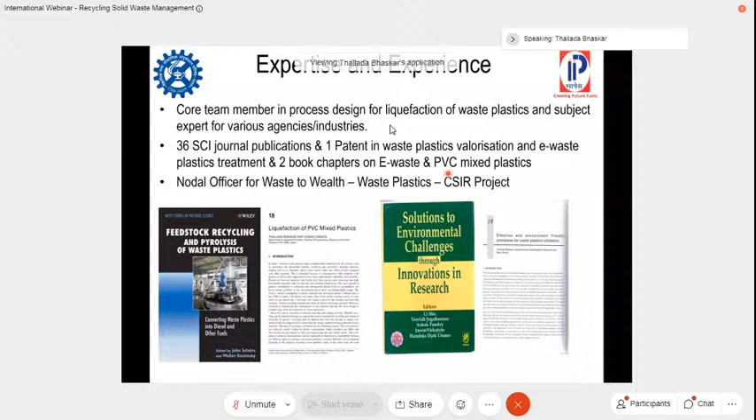But finally, the future of the biomass in decarbonization and the strategic design statements are renewable energy for electrification; for solid bioenergy, that is 60%, with preference where direct electrification is difficult, like the cement industry; 30% for liquid fuels produced from biomass to help sectors like aviation fuel and marine; or use CCUS or BECCS, that is carbon capture, utilization and sequestration, or bio-based.

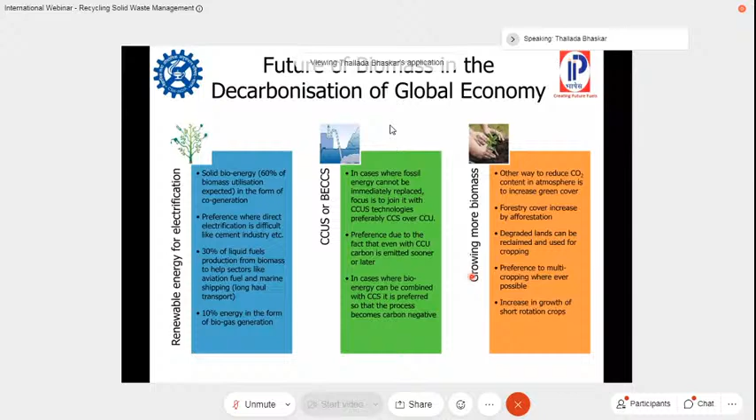These three pillars need to be adopted globally, and in India we need to adopt some of these as per our availability of resources and the combination of these. But for that, we have challenges. Quantitative and qualitative data on availability at particular locations needs to be generated and made available. Work is in progress. There are different barriers during conversion: effective, efficient reactor design, stable catalytic materials for the conversion as well as the process, complete understanding of the decomposition mechanism, and the market demand.

We have done a lot of studies for different companies across the globe and different US agencies, and also life cycle assessment. Otherwise, at the end of life, this will have more environmental issues or resource efficiency issues compared to the present problems. So we have several publications to treat PVC mixed plastics and several publications on biomass for different applications: hydrogen, gasification, catalytic materials, algal-based biofuels, and different approaches. But in the market or in your lifestyle, you can see complex materials at one place. That is why we call it a waste biorefinery.

Now, 4 books in this series have been established. We are working with our experimental data, trying to understand what the best strategies are. The next book will be in December or January, to make sure that some of the processes can be adopted in several places in India. We are working with different industries to contribute the knowledge base to treat these materials.

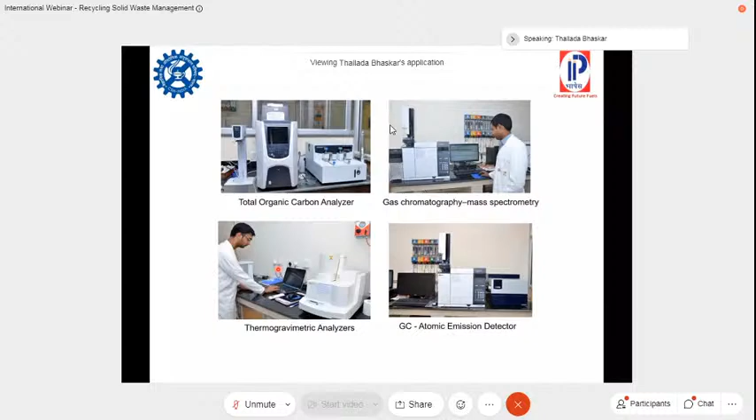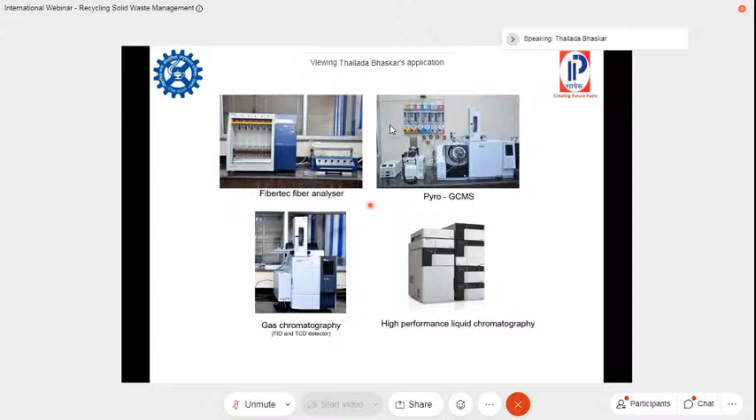Why are so many plants not working, even though we have established around 11, and the professor mentioned about 6? Because of the non-scientific approach, a non-scientific thought process to just make money without understanding the complexities or the science behind it, we cannot work. So these analytical tools will help you design the process and strategic understanding for the different products obtained, whether organic, waste-based, solid biomass, or compositional purposes. We use these to address the strategic design of different materials. Whatever was possible to explain in the time limit, I have explained.

But finally, the statement: if we don't do our scientific work, someone else would do it. But if we neglect our social responsibilities as scientists or teachers, there would be no science. So particularly in the 21st century era of energy problems and climate change problems, solid waste is an intrinsic part of this. If we don't understand the realities or the intrinsic issues, then we will fail at the large-scale issues.